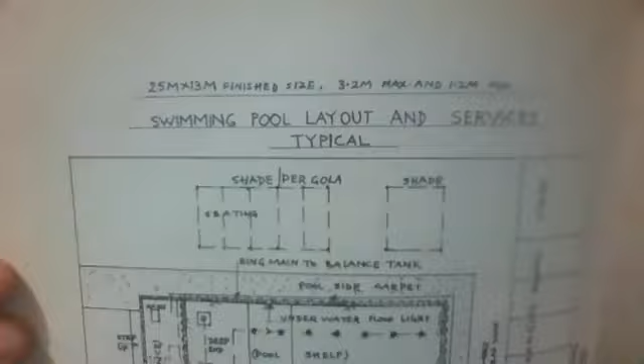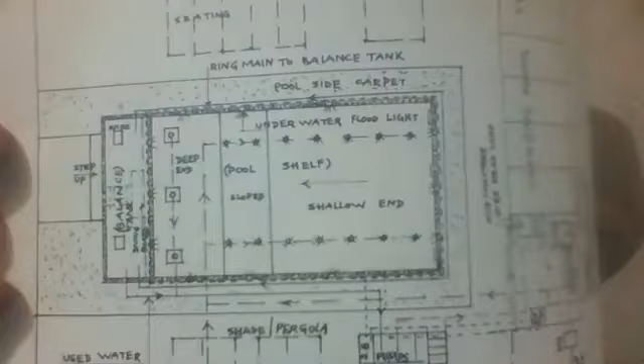Now, I'm going to use pool shells first of all. This is a hand-drawn sketch, 25 meter by 13 meter, finished size. This is swimming pool layout and services, typical. This is the plan, or they call it shell of swimming pool. One end is deep, the other one is shallow. There is a slope in between, and there is one recharge, or you can say

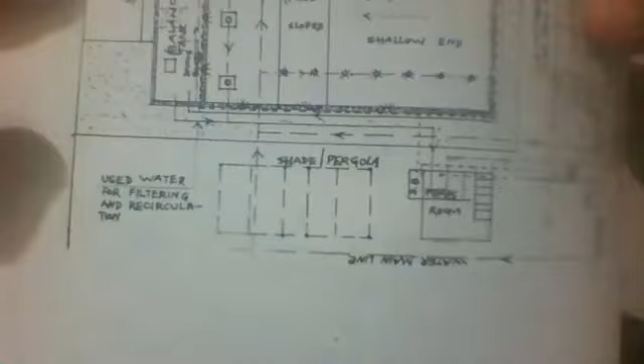balance tank. So one part is shell, one part is balance tank, and there's a ring main around this for services, and there are other facilities here: changing room, pump room, all that is there. We'll discuss in the activities. My purpose is only to show you what I'm talking about, and you'll find another sketch here. This is your sketch.

It's all drawn by me long back, 1986 or 87. In those days by pencil and graph paper, manually, like a draftsman. Of course, I was the draftsman, I was the engineer, I was the manager, everything. And this is that one.

Now I'll go back to one of them so I continue my talk. Yes. So we come back. And I'm speaking now from this. Don't take it by voice. Yes.

So now, keep a control, I said, and I said prepare surface profile. I have shown you what sort of profile is required. Prepare profile surface for laying blinding concrete on compacted earth and let engineer inspect completed base and obtain approval for blinding. This is one part.

You know, field tests must be there, everything must be there before that. You cannot simply say, because this was rock, there's no major problem. It's not rock. Fix elevational marks for reaching top of blinding concrete. Means during your dressing work, you cannot dress below or above that level.